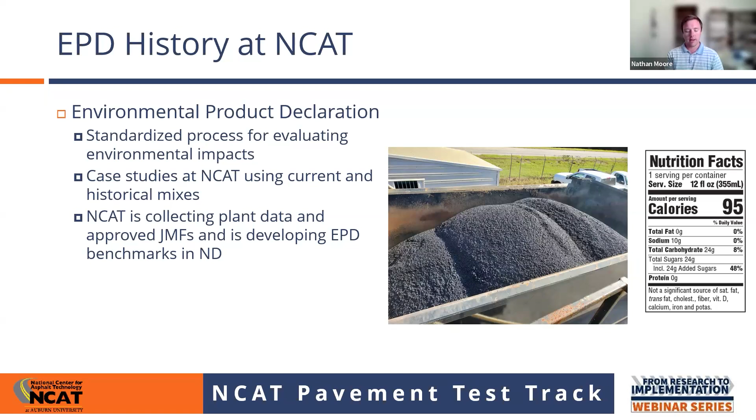But that's really kind of a brief summary of the work that we have done and are doing. Honestly, at this point, I will turn it over to Tom, and he can give you a lot more information on this. So, Tom, I'm going to stop sharing and turn it over to you.

Fantastic, and that was a great introduction to the topic. I am going to do a deep dive on at least one study from the test track, as we always do, and have a little fun here as we go.

So my session's entitled the 3 E's, which is another way to look at it. Engineering, that's where we're going to get into things like pavement design, balanced mix design, getting the right mix. The economics, which is the life cycle cost analysis, and then how we quantify the environment.

When I went through my engineering classes and we talked about the three E's, a friend of mine coined it as: it's intertwined. So there's an intertwinedness to these three things. You can use that word if you want, or you can just let it slide. But you can't have one without the other. If you don't have good engineering, even if you have the lightest environmental footprint, it's not going to last long. You're going to have to replace it. And they interplay with one another.

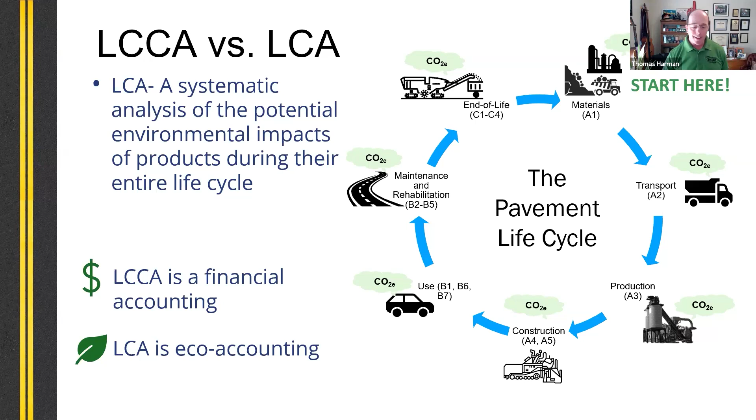And as Nathan just said, when we talk about LCCA, that is our financial accounting, and LCA is our eco accounting. Now in this, there's some rules that come out. We start out with product category rules, and those have been developed and are published. If you go out to the National Asphalt Pavement Association, there's a wonderful website that'll walk you through all of this, and that's the rules of how you're going to capture, measure, store, and report information that leads into these other things like EPDs and LCA.

So the foundation of this is, well, how do we collect the data and in what things? So the next building block is this EPD, which is going to tell us just how many calories are on the side of our breakfast cereal. And that provides us product information from that quarry refinement all the way to the project site and placement. And then lastly, if we have the data of life and what we're going to do for our maintenance strategies, we can come up with an estimation of the environmental footprint across the life. There's some great guidance on that, both on the NAPA website and my former colleagues with the Federal Highway Administration.

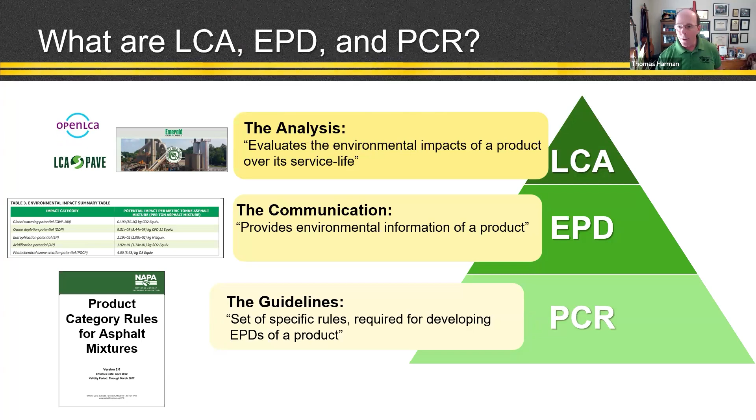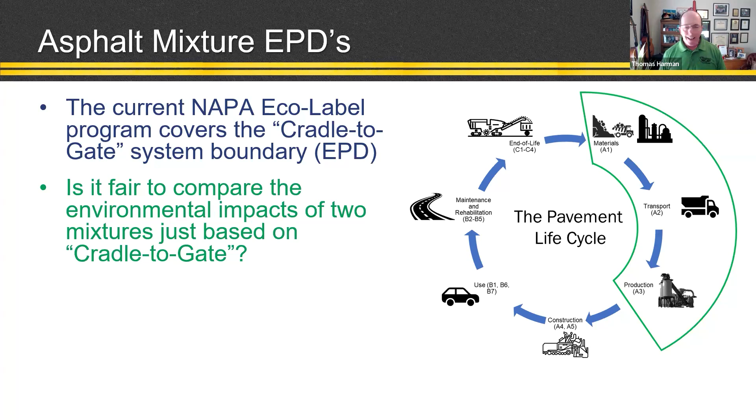So the first question: if I have two mixes with two different EPDs, is it fair to compare environmental impacts just on cradle to gate? Well, the only way that would be appropriate is if I knew that they had the same application and the same life, and everything else the same. But as we know, it would be inappropriate to take an SMA and compare it to a base mix. They have very different EPDs.

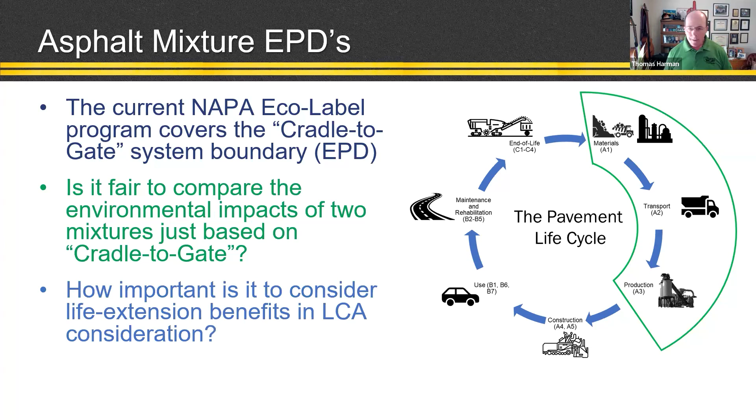We want to have things that are similar, and that's where that full LCA comes in. So we want to make the considerations throughout the entire life. So in a second, I'm going to show you a screenshot from the NAPA website, and I was going to update it today, but it changes every day.

The Emerald Eco Label Program, as of the beginning of February, there were 161 organizations, so asphalt contractors, that had put data in for over 500 asphalt plants and over 4,000 individual mixes we had product declarations on. You can go to this website at the bottom, or simply type Napa Emerald Eco Label and explore that.

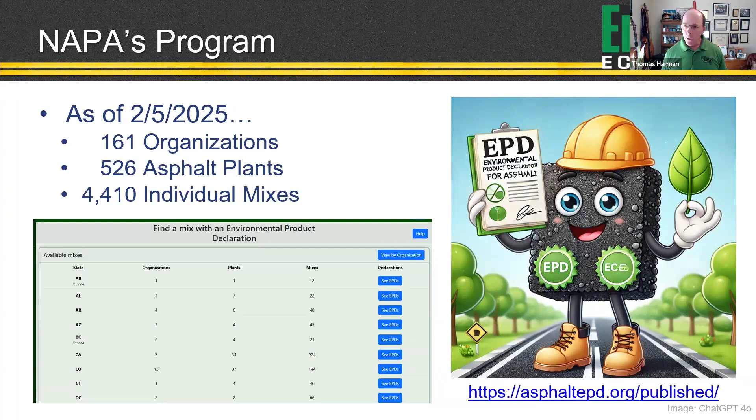I'm going to take an EPD, and it truly was a random EPD. I just grabbed one to see how these A1, A2, and A3 interplay with one another. Let's show that here.

So when you go, there's a PDF document for each mix that you can pull down. It tells you the production facility, who it's for, the performance grade asphalt, the nominal maximum aggregate size. On the next page, it gives a very general breakdown of aggregates, generically named. As Nathan said before, we're not giving away any secret sauce on contractors' individual mixes within the EPD, but the secret sauce is actually behind the database. So the contractor puts in all the real information, and then when you get the product declaration, that is masked, but the environmental footprint is there.

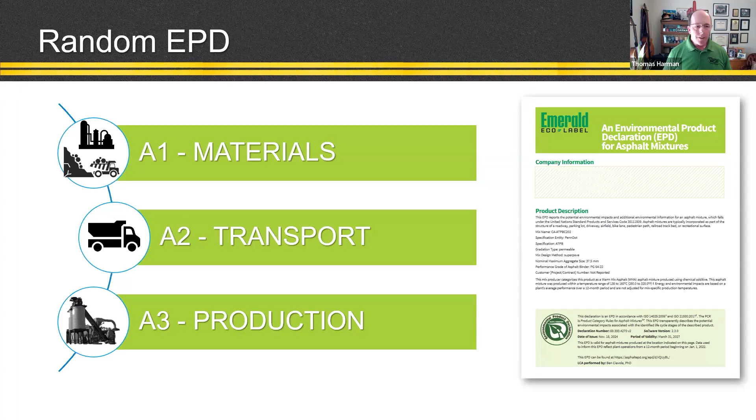So when we look at A1, A2, and A3 - materials, transport, and production - those are measured in a unit of kilograms of CO2e, either per metric ton, which is common in Europe, but in the US per US ton. So the numbers I'm going to show you, it's a little mixed melody here - we're going to have kilograms per US ton.

So for materials, what would that number look like? Remember, this is a random one I pulled up. For the random one I pulled up, I get a value that's right around 32, carried out to 2 decimal places, but around 32. Would I expect the transport number to be about the same, significantly higher, or way less?

Well, in general, unless you're in a few states like Florida and others that have very long hauls, A2 is very small - it's a small footprint. Think of all the energy you need at a quarry and at a refinery to get those numbers out. Here in this particular one, it's 1/3 of the A1 value.

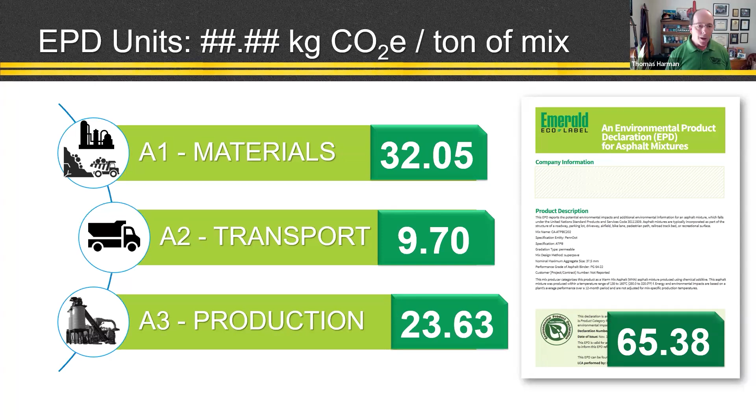Now, A1 to A3, when we look at those values, this is now heating up the plant, producing and getting the mix up in the silos. That number historically, when I look at them, is very similar to A1. For this random one I grabbed, it's slightly lower. You add them all up, you get 65. So truly a random pull out of the database at NAPA, but it gives you a sense of feel for what's going on. So here we have more energy required and associated emissions with the refinement and production of these materials. Transport, I've seen that number below 5, and production usually somewhere in line with A1 and A3.

The National Asphalt Pavement Association shows this in a very simplistic form. This is a typical simple mix. I always remembered when I first started learning about EPDs, you drive 55 a lot of times, typically around 55 kilograms per US ton. Here we have a simple 5% asphalt mix, the transport's 22 miles. And then look, things that are very important for that A3 - what type of burner fuel are you using, all the energy sources coming in.

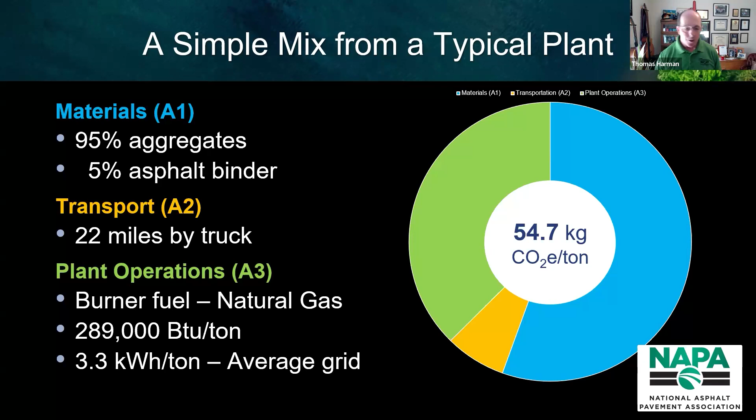So with that, I'm now going to pivot to the test track and show some smiling faces, one of which you've seen. So here we are going to show some data from the test track. And I always like this - it's America's Asphalt Pavement Proving Ground. We have a sponsor meeting coming up, and I hope everybody online today has had a chance to go out and walk this. It's just pretty darn amazing.

My favorite statistic - 1.7 miles of love that you can drive around. There's one of the trucks going around one of the sections. And as of the last cycle, we broke the 10 million mark with regard to axles applied. The miles traveled is 23 round trips to the moon and at least 17 stops at Buc-ee's.

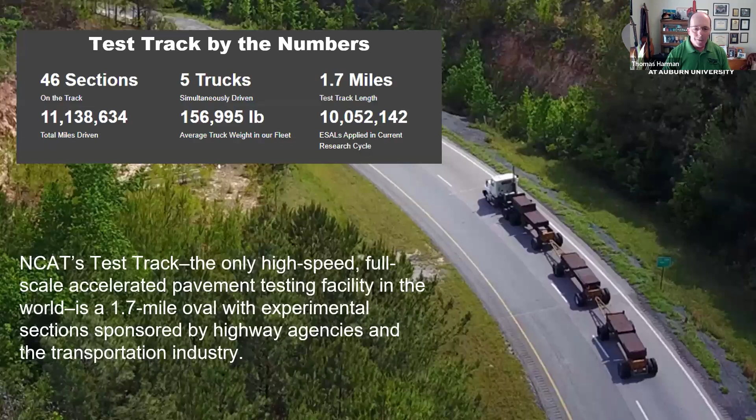I just had a chance to go on a trip with several of my NCAT family. And when we drove past the Buc-ee's down in Texas, for some reason, the rent-a-car had to pull over and stop. So a lot of good stuff happening - we're now trafficking our 9th research cycle.

A lot of good things going on there as well.

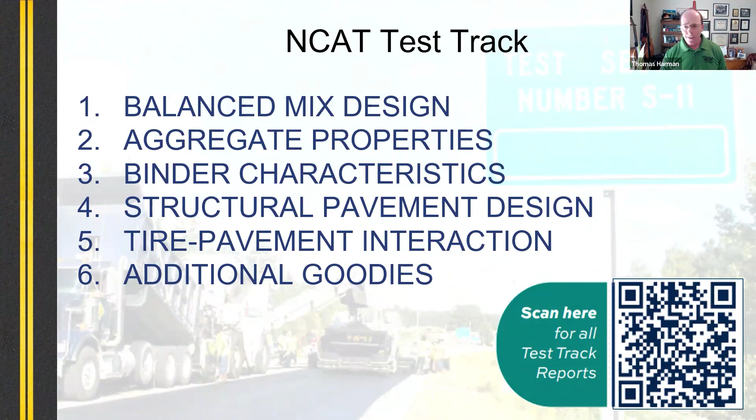For this study that I'm going to highlight that has both life cycle cost and life cycle assessment, we're going to go to the state of Texas. My researchers here, we have Randy, our director, as well as research engineer Fan Yin, Ben Bowers, who is truly with Auburn University but does a lot of work with NCAT, and Suri Gadagante as well. He's our guru when it comes to all things LCA.

For the Texas experiment, it started out as a balanced mix design experiment. They wanted to see how their volumetric mix design back in 2018, which is Superpave based, would compare to this newfangled balanced mix design. They were placed next to each other in S11 and S10. It was a classic: we're going to mill down 2.5 inches and we're going to do an inlay of 2.5 inches.

When we milled down the 2.5 inches, we had about 15 to 20% cracking area. It's very common that agencies don't go down to get all the cracked material up before they place the next section down. So Texas thought this was a very realistic experiment from that standpoint.

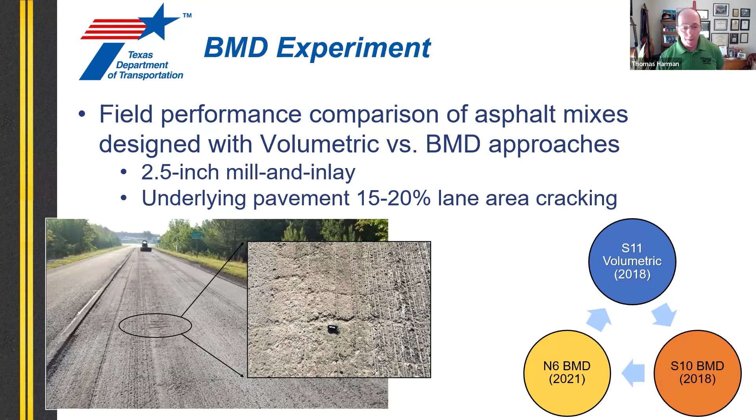For the mix designs, the volumetric mix design had a total binder content of 4.7%. 20% of that was RAP binder replacement. When we went through the balanced mix design, looking at rutting and cracking, we got higher asphalt content, 5.5%.

After this experiment had been trafficked for a cycle, Texas went one step further and put down an additional section that was designed using balanced mix design, everything else pretty much the same. In this one, we had slightly lower binder replacement, 19 instead of 20, and the optimum asphalt content was 5.3. Other volumetrics are there on the screen.

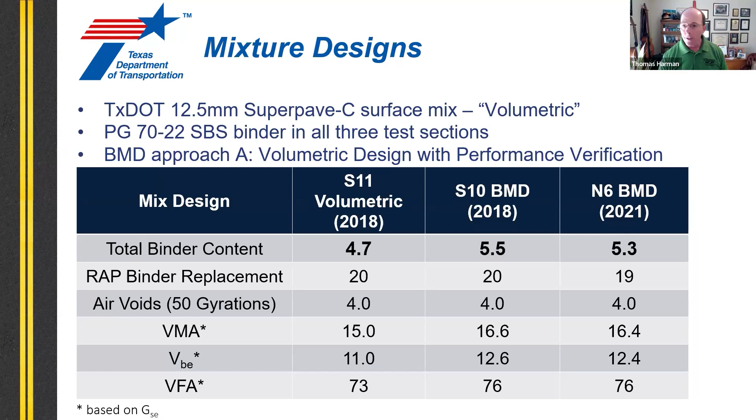So for Texas's balanced mix design, they wanted to assess cracking, because this is a mill and inlay, using the overlay tester. The parameter we look at is the progression rate, or beta. Lower values are better. And then comparing that against the Hamburg wheel tracking test, again, lower values are better.

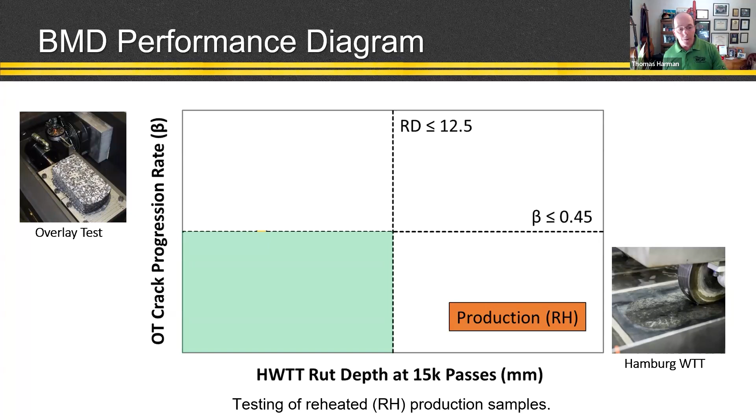When we look at these mixes, they plot up as such. Superpave volumetric is not in the sweet zone. So immediately you're thinking we might have some cracking occurring earlier based on a balanced mix design philosophy. The one in S10 was definitely in the sweet zone. And then N6 was right at the edge, but still fully met what we would consider a balanced mix design.

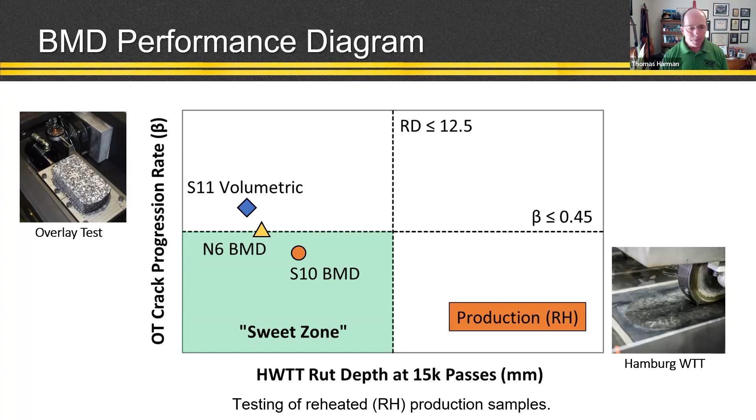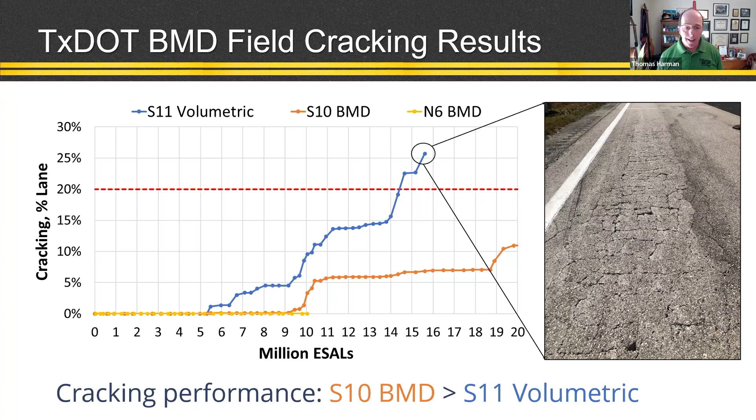So Texas elected to load the first two an additional 10 million ESALs, and we had to discontinue loading at right around 15.5 million. You can see here in this photograph, we're starting to see severe cracking. Our threshold was 20% cracking. And if you compare that to the balanced mix design, very conservatively, we got another 5.5 million ESALs applied to that section.

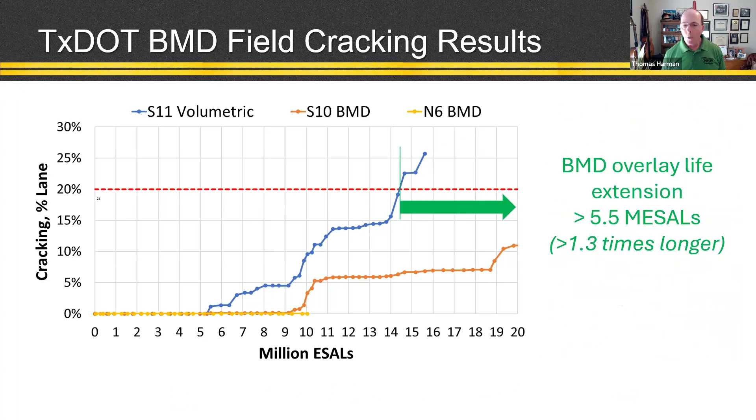And at that point, we had just reached a 10% cracking level. So for our analysis, we're going to conservatively assume that that mix lasts 1.3 times longer than the Superpave volumetric mix.

So to do a cost analysis, we need to know how much this stuff costs. Texas uses a 40-year analysis period. Their discount rate, which looks at interest and inflation, is 3.72%. For the 12-year performance period of the volumetric mix, we're going to use that as our benchmark, that we would renew it over that 40-year period. And then we would have that 1.3 multiplier on our first balanced mix.

The volumetric mix is around $80 a ton, based on the cost we had. And because of the additional binder, the BMD mix was slightly higher, around 85.

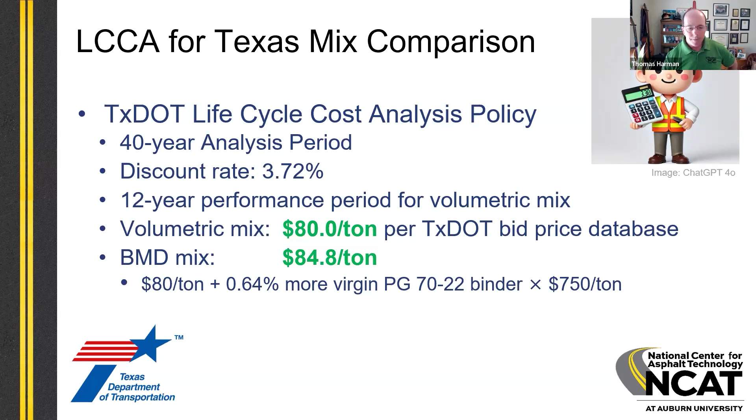This just shows how we would stage that out for volumetrics. Every 12 years you would see a mill and fill, slightly longer for the first BMD mix, and even longer for the new BMD mix, which based on laboratory and field observations, we think is going to last 30 million ESALs before it needs to be renewed.

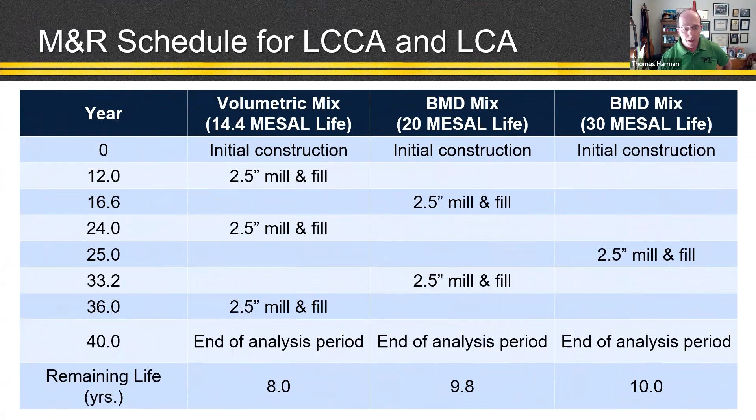In a traditional low bid environment, the volumetric is 6% lower in cost, so we have a 6% increase for both of those because of the additional binder content. So if we're just doing low bid alone, Superpave is going to win on this.

When we do a life cycle cost analysis using net present value, we see a significant change: a 17% savings with the balanced mix design in the first cycle, and the new one, because we think it's going to have an even additional life, has 36% savings.

Now we want to transition into this LCA. Here's the Federal Highway resource that's out there, a published report. Again, we are not going to include use phase or emissions coming off for this. This is a research study that Surrey conducted without third-party validation. If you read through this document, it'll talk about a full LCA actually having additional validation that occurs within it. But let's show what the data includes.

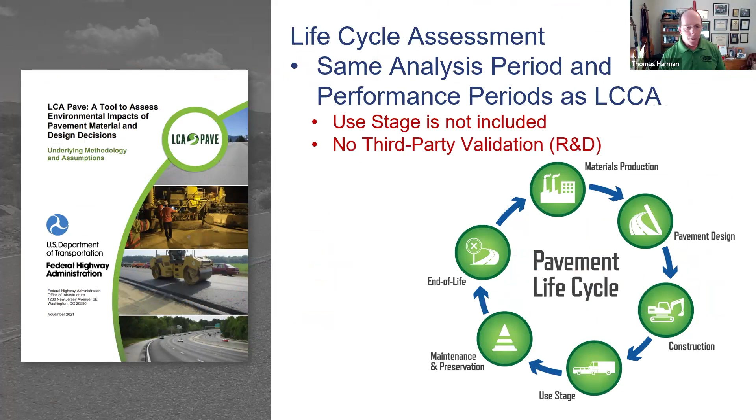First off, there's about a 10-minute drive between the production facility and the placement. In the LCA, the data that Surrey provided me, we have cradle to construction. All of these mixes were produced at the same plant, same haul distance, and the same laydown equipment, so there's no difference in that. So this differential of 10% you see here is very similar to what we would get if we did an actual EPD on each one of these mixes—a slight increase, and that is due to the energy associated with the additional binder.

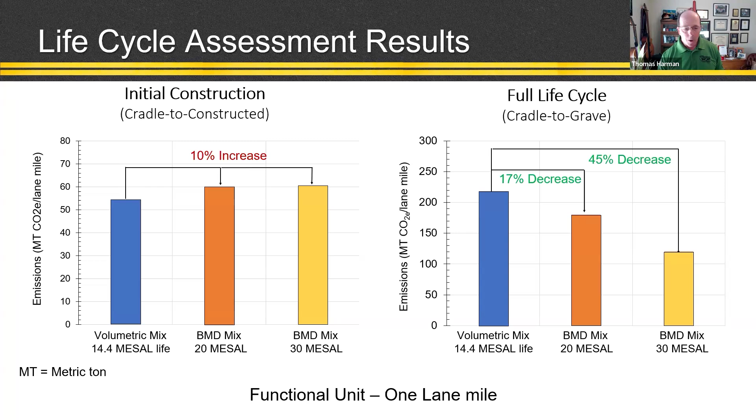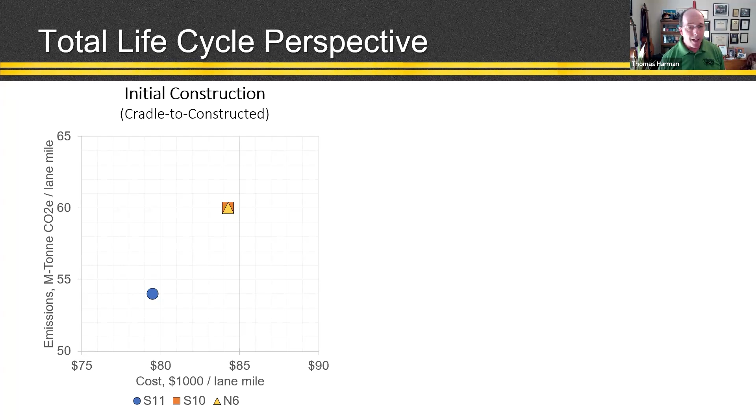When we do the LCA, we see similar to the life cycle cost analysis, a 17 and a 45% decrease in emissions generated over a 40-year period of these mixes. So one way to look at this is if I just compare emissions to cost, hands down the Superpave mix, the blue dot there, has the lowest initial cost and the lowest initial emissions, and both the BMDs have a higher cost and higher emissions. But when you factor that out over the life of the pavement, we see them invert—a significant change in the ranking when you actually factor in the total life of the pavement.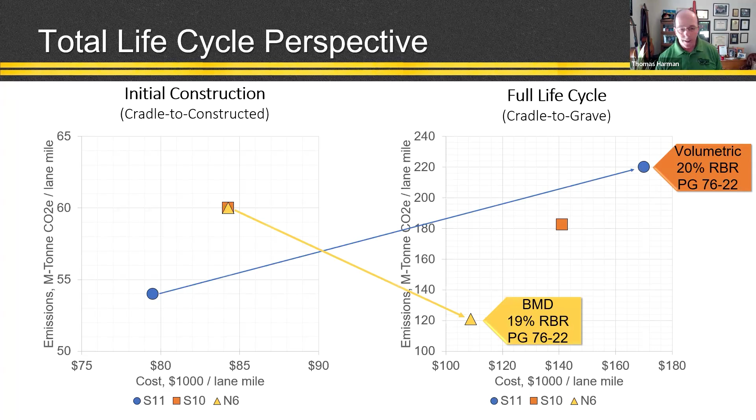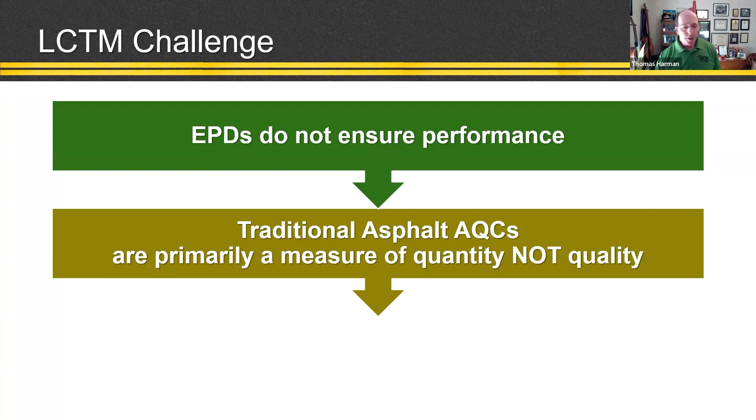So our challenge when we look at things like low carbon materials is EPDs do not ensure performance. They definitely provide us energy consumption and emissions associated with the production and manufacture of the product. Traditional asphalt AQCs are primarily focused on quantity, not quality—that's our volumetrics versus our BMD criteria. So the good news is we're in a wonderful position with balanced mix design to give us those essential tools to help us actually balance out the cost and the environmental impact as we build out these mixes.

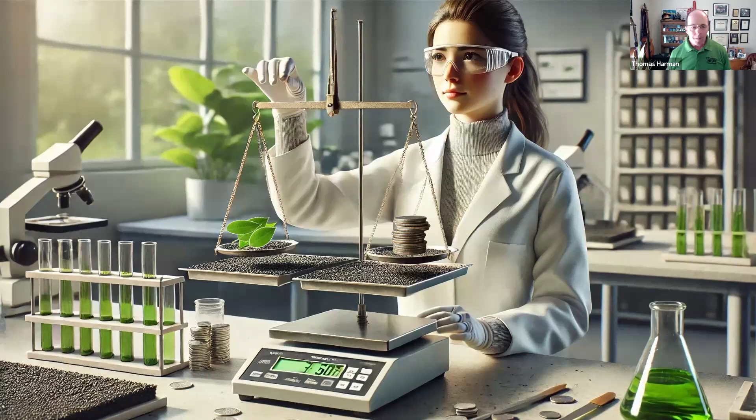So with that, I am very pleased to finish this.

So today I'm going to briefly go over PennDOT's EPD program and how we've implemented it up until this point. Starting off, just to give everybody a glimpse of PennDOT by the numbers: 40,000 miles of roadway, 25,400 bridges. We have a lot of infrastructure, and we use a tremendous amount of asphalt annually. So we are definitely in a position to benefit from balanced mix design as well as the data collected by our EPDs.

I'll briefly go over our team members, where we started in 2023, our journey through 2024, where the bulk of our work took place, and then where we are right now in 2025. Some items we believe are in our future, our look ahead, and then just some slight challenges that we've encountered on this journey. At the end of the presentation, we'll open up to any questions you may have on behalf of PennDOT's journey.

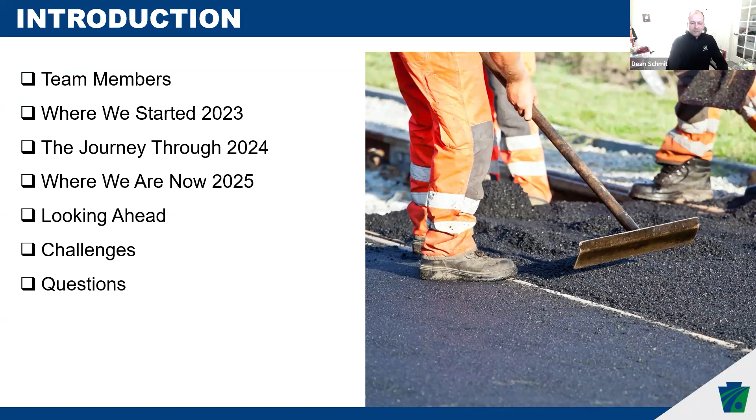With our team members, this started with an EDC 7 innovation for EPDs for sustainable project delivery. FHWA was very much the driving force initially with us and a key player or partner in our journey. We ultimately ended up bringing a consultant on board to assist us with some administrative functions. Initially, EPDs were brand new to PennDOT, and so there was a great deal of literature that we had to sort through and just wrap our heads around what EPDs were and how they were going to be beneficial to us.

Industry stakeholders were very fortunate that we had some contractors across the Commonwealth that were ahead of us in championing EPDs, and they were already working closely with the Pennsylvania Asphalt Pavement Association and the National Asphalt Pavement Association. We were able to lean on our industry initially and learn from what they had begun to look at. A big part of industry's desire was some commercial projects they were getting involved with, like Amazon and Walmart, wanting to know the global warming potential of their mixtures. So we were all kind of going on this journey with similar goals in mind.

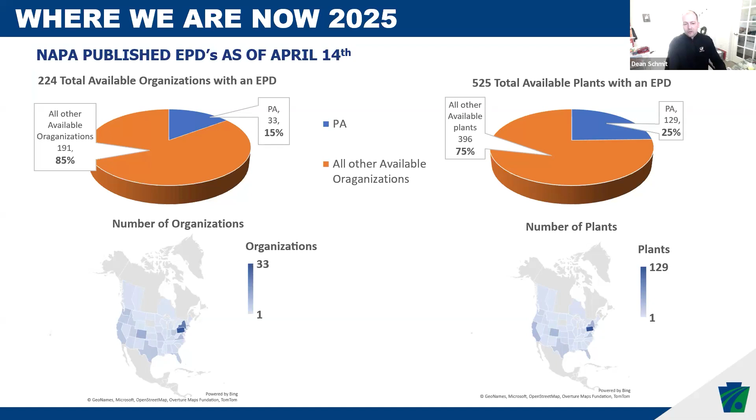When it comes to actual published EPDs, Pennsylvania makes up 46% of all the EPDs in the eco label database, so we're pretty proud of that. It's something we've shared with our producers, basically thanking them for all their efforts. With that being said, it's nice that once we get into our benchmarking efforts we'll have such a vast amount of data, and we'll be able to see trends local to our region and our state.

So looking ahead into the future, we did have a couple areas of concern. Like Tom had mentioned with the A3 categories, we had some concerns over a low value with A3, and it just didn't seem right. So we reached out to NAPA to ask if there was any type of auditing process, or how we should handle this. We'd spoken with the vendors, and their communication to us was that they'd input everything correctly, it was accurate, and they're that efficient.

Through that discussion with NAPA about data integrity, we were asked to become one of 8 DOTs partnering with NAPA to consider a process to not only automate the EPD delivery, but also to help establish their quality control protocols, for accurate verification of foreground data, as well as statistical triggers like what we encountered. So we're excited to use our 46% of data to help NAPA support their efforts. Again, a great example of how we've been fortunate on this journey to partner and collaborate with the asphalt industry.

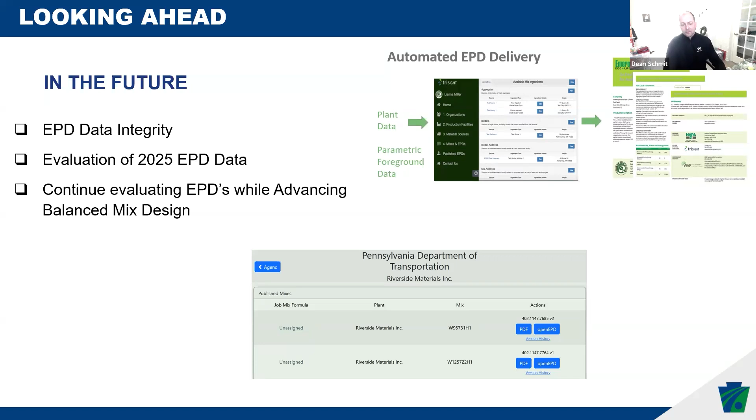So we feel that we have enough data that we'll be able to make some educated decisions here and drive good business for both the department and our material producers. And then we want to continue to evaluate EPDs while also advancing the balanced mix design. Tom did a great job explaining the benefits of that, because one of our concerns, like Tom mentioned, we don't want to establish thresholds that favor underperforming materials. That's especially important to me, considering my background is in maintenance.

So how we see them being used in the future, we anticipate that EPDs will help us establish good industry averages and benchmarks. We hope they'll help us enhance efficiency in the industry, and continue to use them as a tool to help monitor asphalt performance. Hopefully one day, they'll be beneficial in modifying mix designs and helping us through BMD to get a better performing material up front. Ultimately, we're hopeful that will ensure an opportunity to reduce maintenance costs and resource consumption over time.

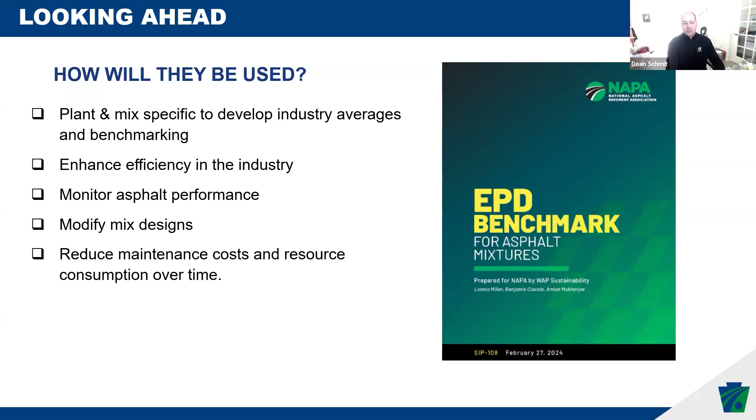When EPDs are submitted with values that seem out of line, that's one of the challenges I don't think we've really overcome yet, that ability to validate the data. We're looking forward to that being something that'll come out of our cooperation and coordination with NAPA in the future. And ultimately, our road ahead is still uncertain, and we believe that's a good thing. PennDOT's very fortunate that we have so much EPD data being generated by our producers, but we also don't have any buy clean policies driving our end goal.

So we feel pretty blessed that by not having that policy dictating what we're doing, we can work very closely with industry and make very good engineering decisions from an economical standpoint, trying to steal two of the three E's that Tom had discussed, but really just using the data we're collecting to drive good business decisions instead of enforcing the data into business decisions. So we're very excited about that.